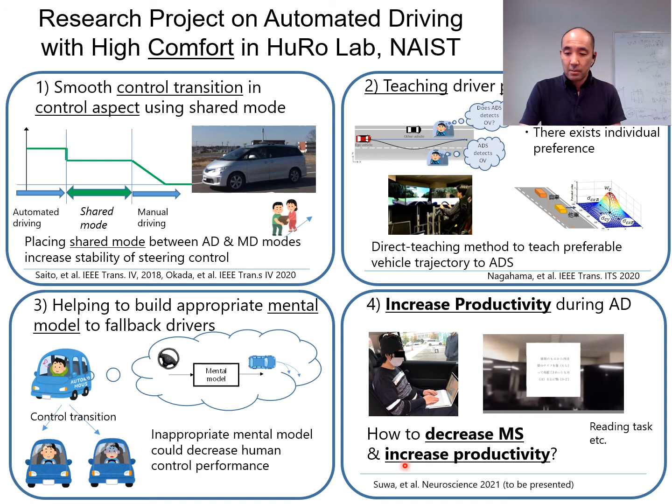As a basis of this project, we are working on motion sickness estimation and its reduction by experimental and modeling research. So I focus on this in this presentation.

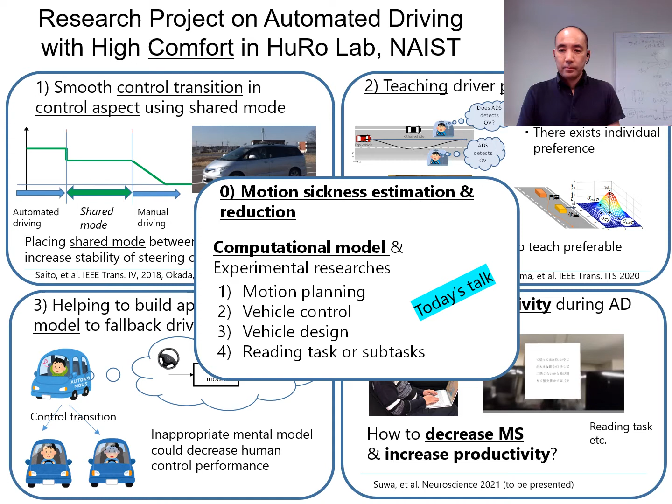This slide shows a kind of advertisement of my colleagues' work. Another laboratory named Interactive Media Design Lab in NAIST also conducts research on the motion comfort of AD. The project is named XRM, Multimodal XR System on Autonomous Mobility, which is conducted by Professor Kanbara and Dr. Sawabe.

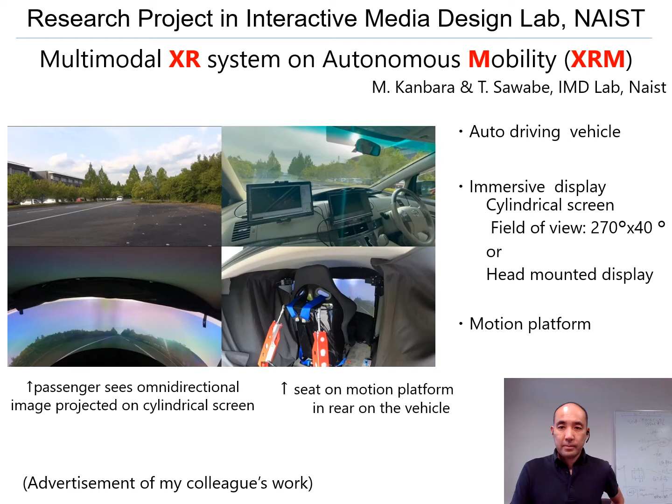They produce this kind of nice multimodal XR system on AD, which includes an immersive display like this with a cylindrical screen or head-mounted display, and also a motion platform to actuate a seat. The purpose of this project is to make the space comfortable. They are working on this to avoid motion sickness and diminish the sense of movement during transportation.

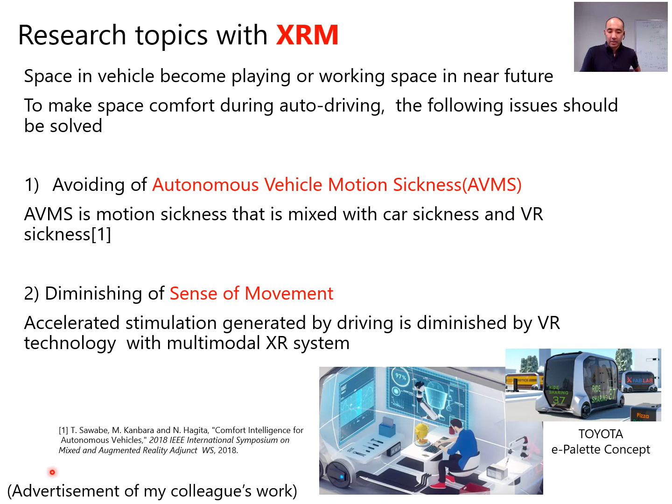Okay. Again, this is a kind of advertisement of my colleagues' work, not mine. So let's start my own theme from now on. Again, the title is Modeling Motion Sickness and Its Potential Application to Automated Driving.

As you know, at level 3 or higher levels of driving automation defined by SAE J3016, a driver becomes a passenger. So subtasks in the car will increase, and there is a concern about increased motion sickness while enjoying AD. Let's consider the original purpose of AD. I believe it is to release the human driver from driving, to reduce workload and increase productivity during transportation. So of course, motion sickness should be removed.

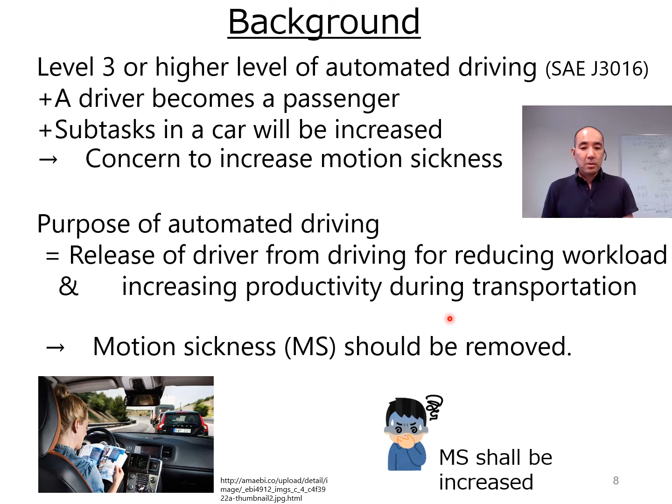We have lots of research work which emphasizes the importance of motion sickness in AVs. These two are pioneer works. Number one, Diels and Bos pointed out the concern of motion sickness in the context of AVs, such as seat location and the use of IT devices, and introduced design guidelines for comfortable and productive AVs.

And Sivak et al. conducted a survey regarding what kind of activities people want to do in automated vehicles, and estimated the increased possibility of motion sickness. And I myself pointed out the importance of comfort in AD with emphasis on the vehicle control aspect.

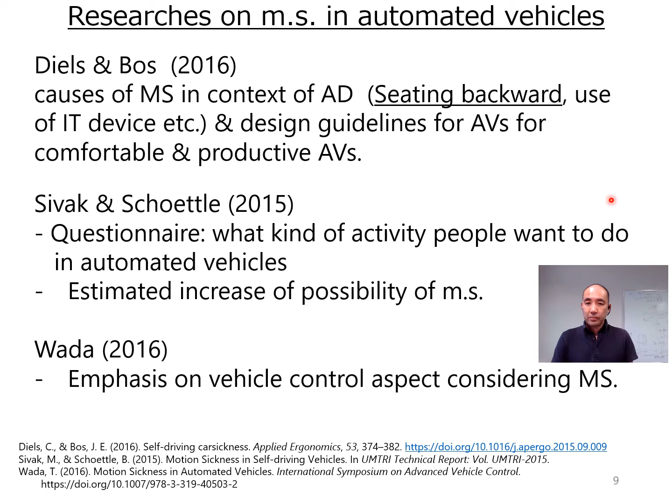Quantification of motion sickness is very important to develop countermeasures for reducing it. So far, much effort has been made, including questionnaires, biological signal measurement, and computational models. I focus on the computational model in this presentation.

First of all, I mainly overview computational models of motion sickness, including our recent activities. Then, in the final part of my presentation, I will discuss the potential application of the computational model of motion sickness to automated driving.

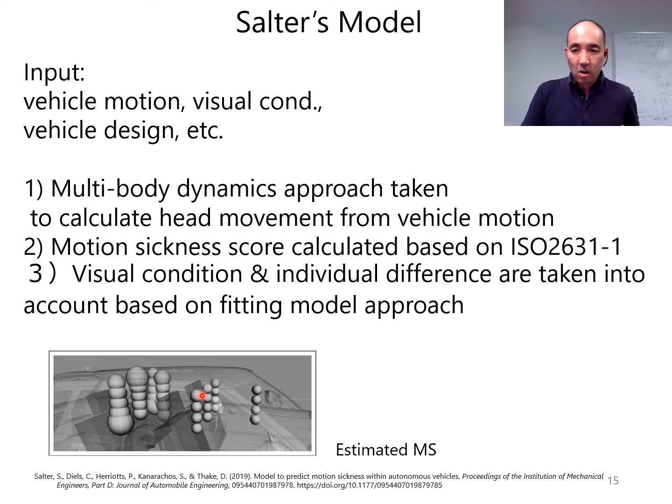So this model successfully estimates the difference of the motion sickness severity by visual condition. The size of the sphere represents the severity of motion sickness, and this figure demonstrated that the severity of motion sickness is smaller when sitting in a front seat.

Okay, let's move on to the second type of model, the model based on the hypothesis of mechanisms of motion sickness. Sensory conflict theory is a well-known hypothesis that motion sickness is evoked by a conflict in sensory information. The cause of the conflict is thought to be inter-modality sensory information. For example, visual versus vestibular signals, and sensory information versus experiences based on our memory, which is described by an internal model that is thought to be built in the central nervous system.

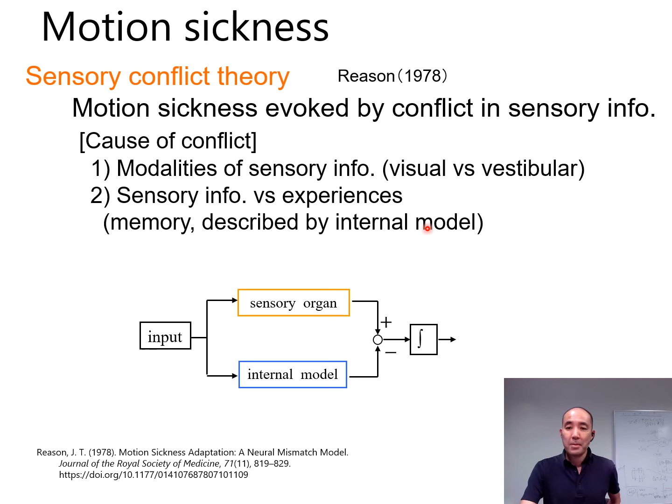Okay. The question we have in the sensory conflict theory is: what is the conflict? The cause of the conflict. It is very difficult to answer, but the only exception is subjective vertical conflict theory, which is one of the branches of the sensory conflict theory. This theory defines the conflict as a discrepancy between the vertical direction sensed by our sensory system and the estimated one built by our experiences, which is thought to be formed by our internal model.

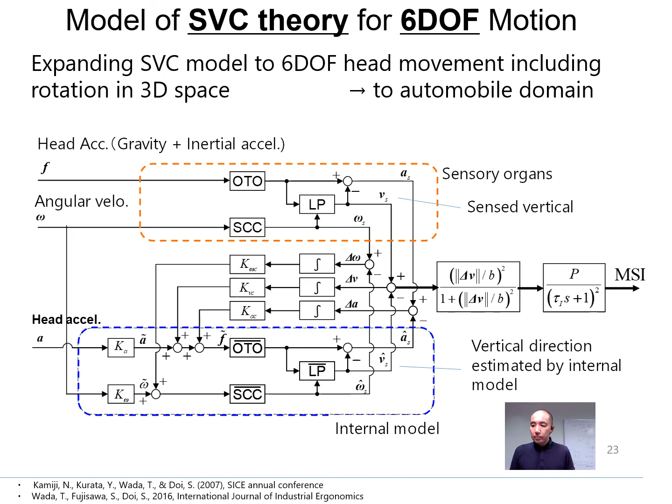Of course, the input of the model is the three-dimensional head acceleration and three-dimensional head angular velocity. Here is the detail of the 6 degree of freedom SVC model. These are the transfer functions of the SCC, the otolith, and so on. But due to lack of time, I'm omitting the detail.

We also compared the model output with experimental data for horizontal vibration. Griffin et al. shook the subjects laterally, in which the head could rotate. The vibration conditions are something like this. They shook for 30 minutes, and they measured the incidence of mild nausea. In order to compare the estimated MSI and the mild nausea incidence, we employ normalized indices like

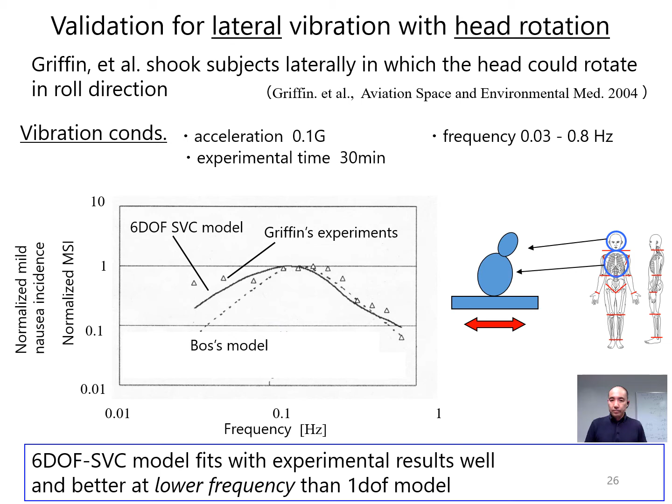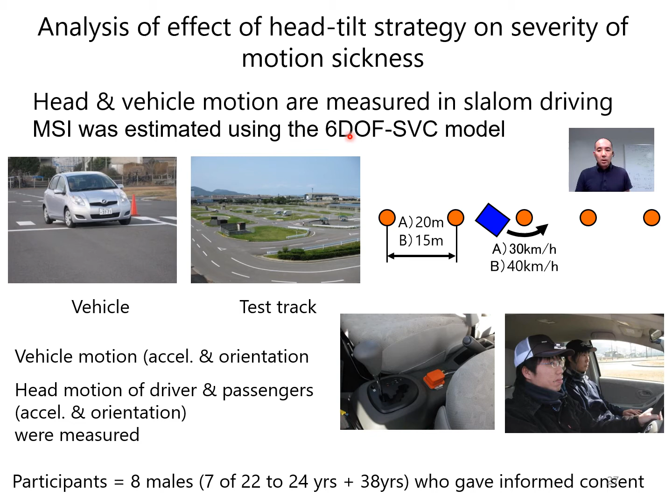Validity of the 6 DOF model has been demonstrated in a variety of scenarios, including vehicle passengers. So we also applied the model to analysis of the effect of head tilt strategy on the severity of motion sickness. Head and vehicle motions were measured in slalom driving by using an IMU. The head motion of the driver and the passengers was measured using the IMU, and vehicle motion was also measured by the same IMU. The predicted MSI was calculated using the 6 DOF SVC model. The measured head movements were input to the model, and this is the result, the predicted MSI.

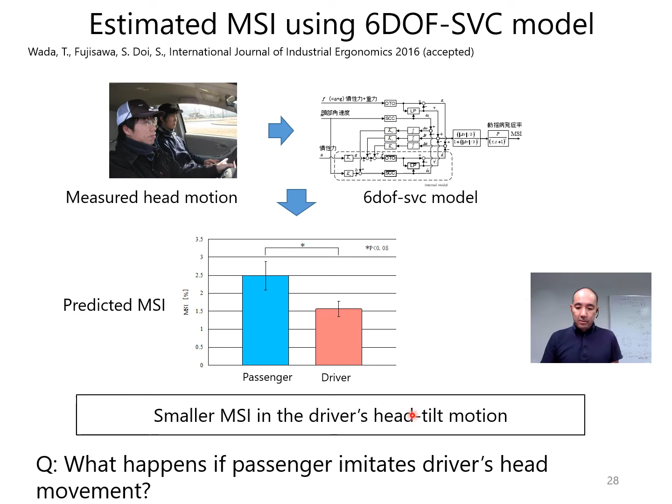As you can see from this figure, the MSI of the passenger was significantly greater than that of the driver. Now we have a question: what happens if the passenger imitates the driver's head movement? We tested it. The purpose of this experiment was to investigate whether active head tilt of the passenger, imitating the driver's head, has an effect to reduce motion sickness or not.

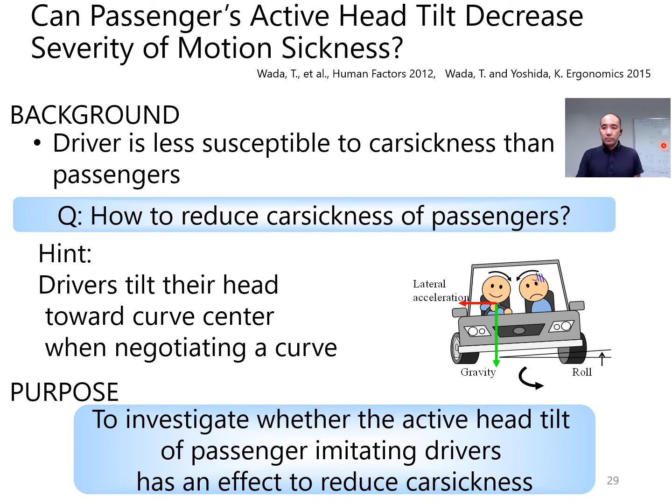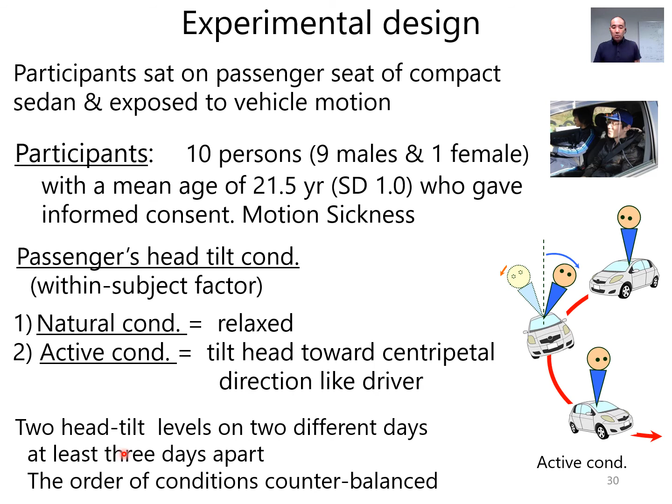This slide shows the experimental design. The participant sat in the passenger seat of a compact sedan and was exposed to the vehicle motion. We have two head tilt conditions. The first one is the natural condition, which means that the head moves along the centrifugal force. The other is the active condition, in which participants were asked to tilt their head toward the centripetal direction, like the driver. These two head tilt conditions were conducted on 2 different days, at least 3 days apart. And of course, the order of the conditions was counterbalanced.

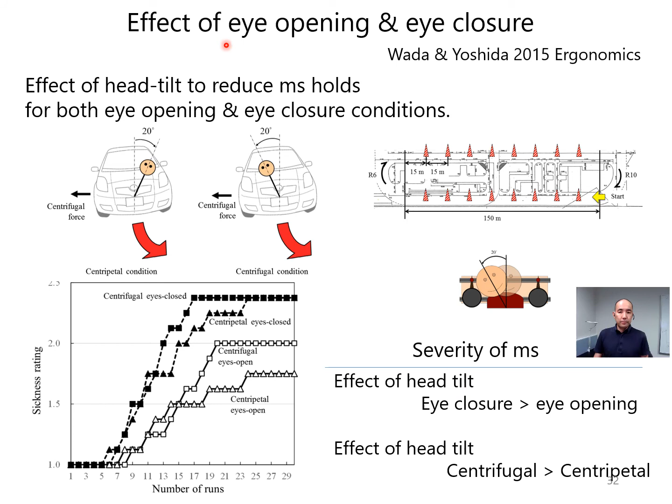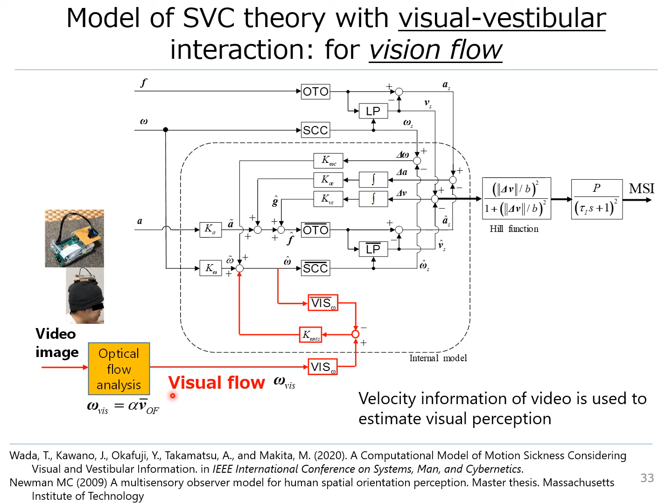In the numerical simulation, we can directly specify visual input like this. To calculate the predicted MSI using experimental data, it is necessary to calculate this visual flow in some way. So we proposed a method to calculate this value from the video image based on optical flow analysis. The mean of the optical flow velocity across all pixels that exceeded the threshold was used as the visual velocity.

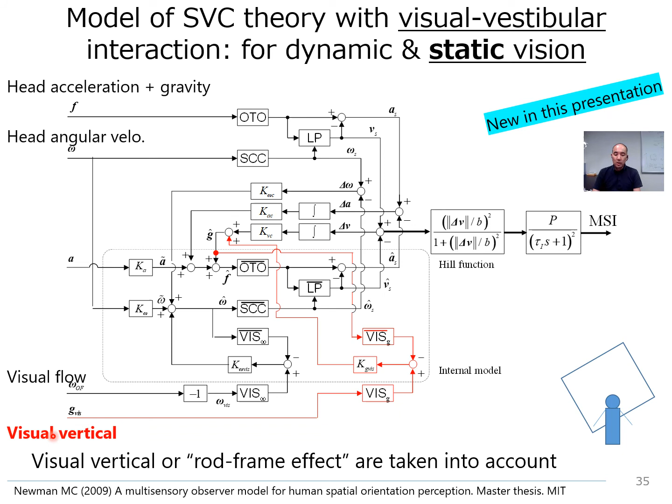Let me check. The output of the model is the predicted MSI, and the input signals are three-dimensional head acceleration, translational motion plus gravity, three-dimensional head angular velocity, the visual flow based on optical flow, and visual vertical, which was newly added in this model.

So we need to conduct experiments to check whether the calculated MSI obtained here is appropriate or not, and to tune the parameters in the model. However, at least I'd like to say that the tendencies obtained here agree with our experience.

Okay, let's move on to the next model that captures the effect of human motion prediction of exogenous motion. It is known that human predictability on exogenous motion affects motion sickness. For example, regarding the passive condition, repeatability or randomness of motion sequence affects motion sickness. And upcoming visual information, such as the road ahead, also reduces motion sickness. And literature demonstrated that artificial audio or visual cues facilitate reducing motion sickness.

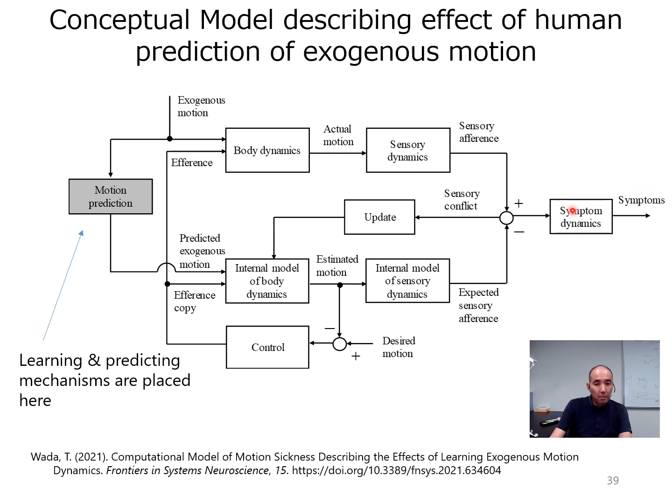Okay. For this block, the recursive Gaussian process regression model is used, and this block outputs the predicted mean of the next motion, as well as the predicted variance. This is a kind of the inverse of the confidence, right? And this variance is used to tune the weight of this signal, to calculate this signal. Okay.